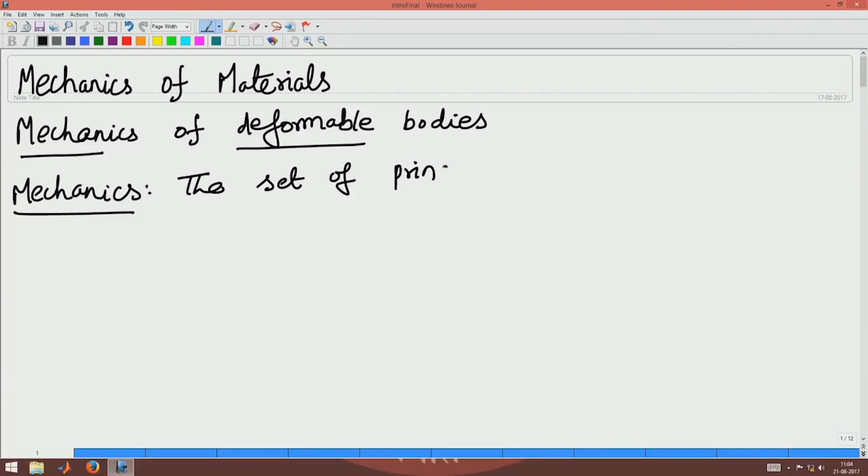Here I have used two terms, one is mechanics, the other is deformable. Let us understand what they mean. First, mechanics means the set of principles that govern the displacement of the body.

You would have had a previous course in mechanics called engineering mechanics, where you would have dealt with the mechanics of rigid bodies. In contrast to rigid bodies, what we are going to look at now is deformable bodies. So, let us understand what you mean by a rigid body.

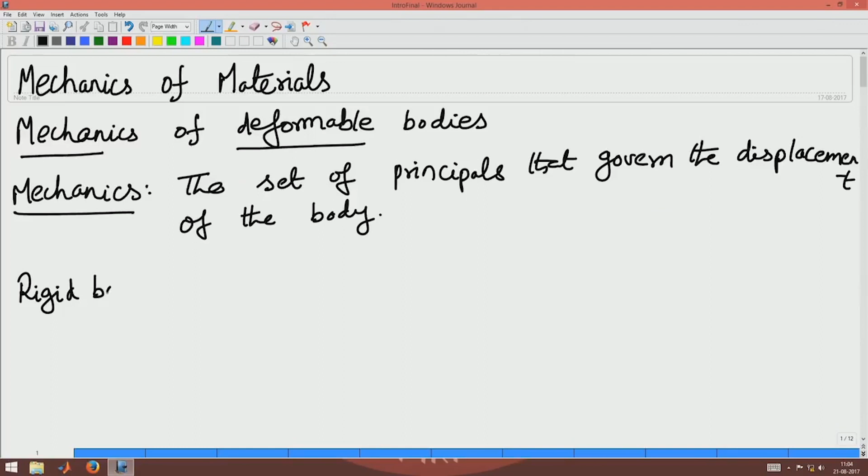A body is said to be rigid if the distance between any two points in the body does not change due to the application of a force.

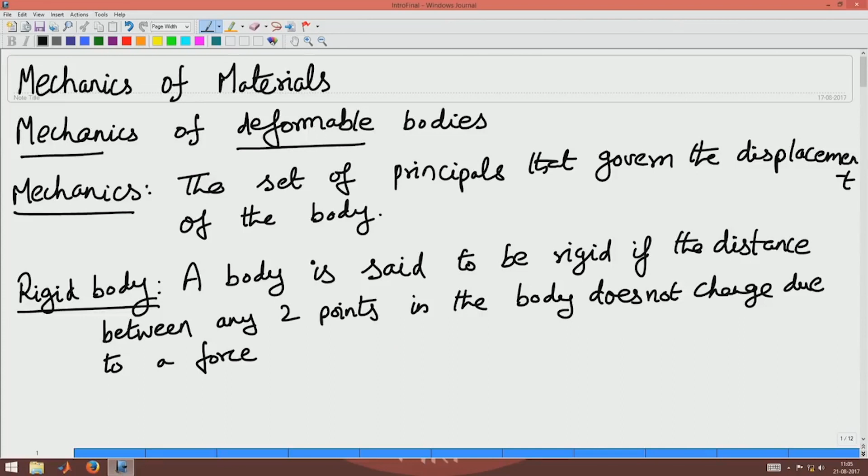In contrast to this, we have what are called deformable bodies, wherein a body is said to be deformable if the distance between two points in the body changes due to force.

So, in previous courses you would have assumed the bodies to be rigid, analyzed them as rigid bodies, and related the force and the displacement of the body directly. Vis-a-vis, in this course you are going to assume the body to be deformable and analyze it as a deformable body.

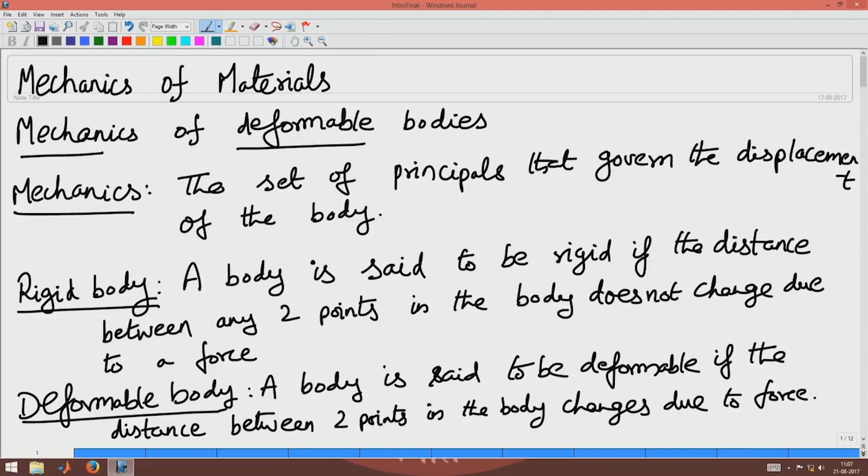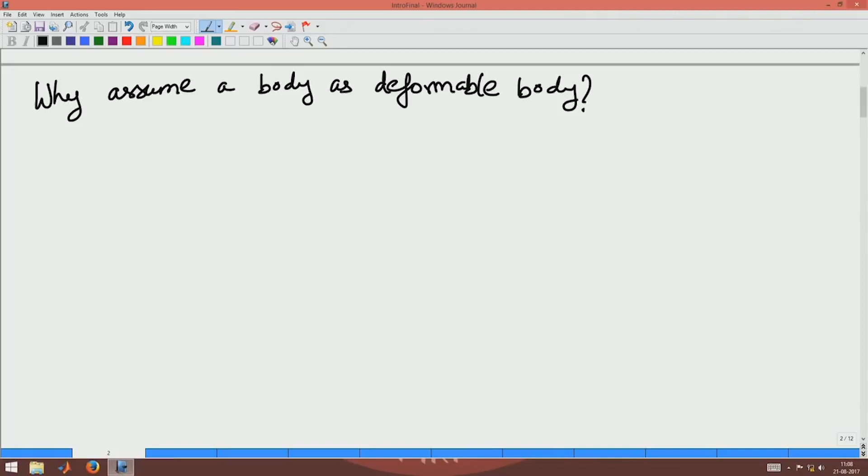Next, let us understand why you want to relax the assumption of rigidness of the body. Why assume a body as a deformable body and not retain the assumption that the body is a rigid one? The reason is the following.

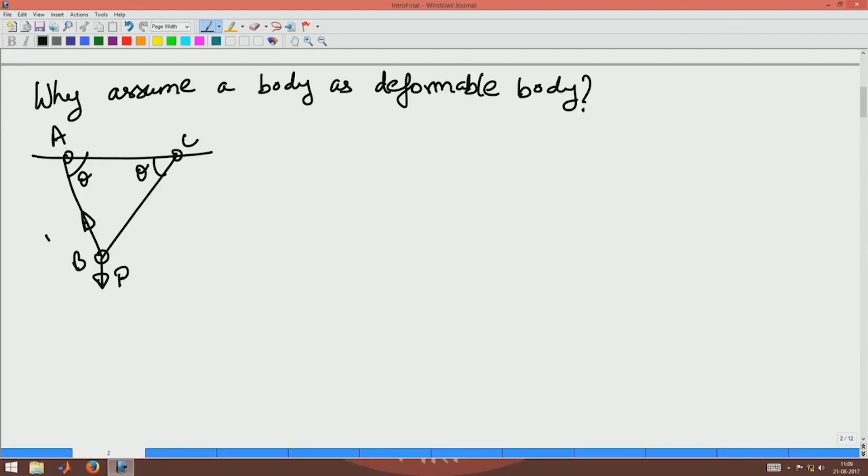Let us consider a plane two-dimensional truss of this geometry, where A, B, C are hinges, and the angle at A is theta and the angle at C is also theta. You apply a force like this at B. Now, you can use the force equilibrium equations to determine the force in member FAB and the force in member FBC.

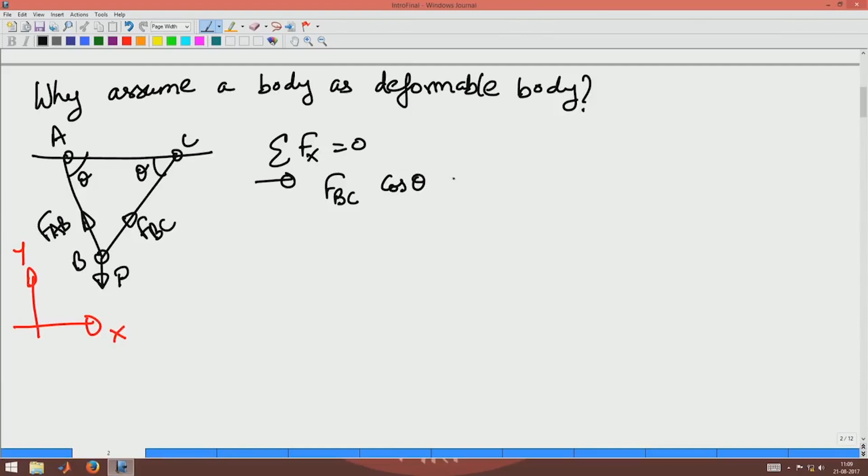Essentially, the force in the x direction is 0, where x and y directions are these. Assuming this to be the positive x direction, you will have FBC cos theta minus FAB cos theta equal to 0, from which FBC must be equal to FAB.

Next, if you assume the vertically acting force is positive and write force equilibrium in the y direction, you get FBC sin theta plus FAB sin theta, with FBC and FAB equal to F, equal to P. This implies 2F sin theta equals P, so F is P by 2 sin theta. So, you have found the member forces FAB and FBC from simple equilibrium equations.

On the other hand, say I add another member here, BD. Now let us rewrite these equations; this is 90 degrees here. The Fx equation remains the same for truss ABCD: sigma Fx equal to 0 implies (FBC minus FAB) cos theta equals 0. But summation of vertical forces implies (FBC plus FAB) sin theta plus FBD equals P, where this is FBD.

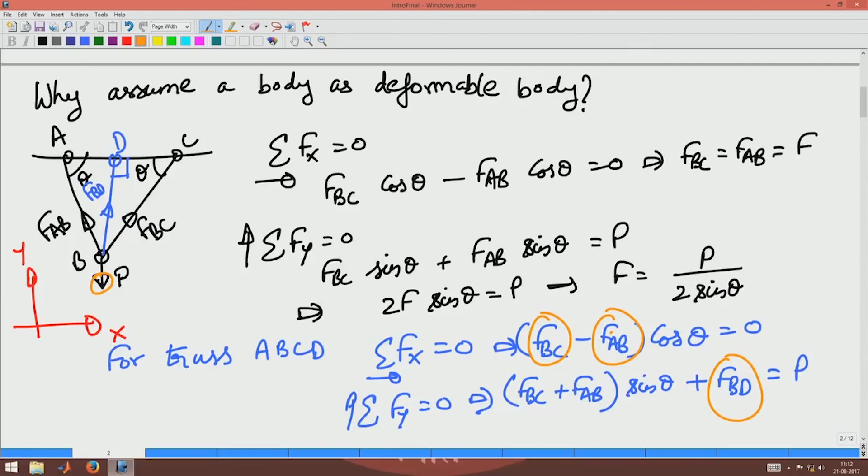In other words, if you apply a force P, point B would move down here. So, you have to assume this point moves down and do a set of calculations based on that assumption. Hence, you have to assume the body is deformable, not a rigid body. This is why it is important to understand how to analyze bodies as deformable bodies. So, we saw what a deformable body is and what mechanics is.